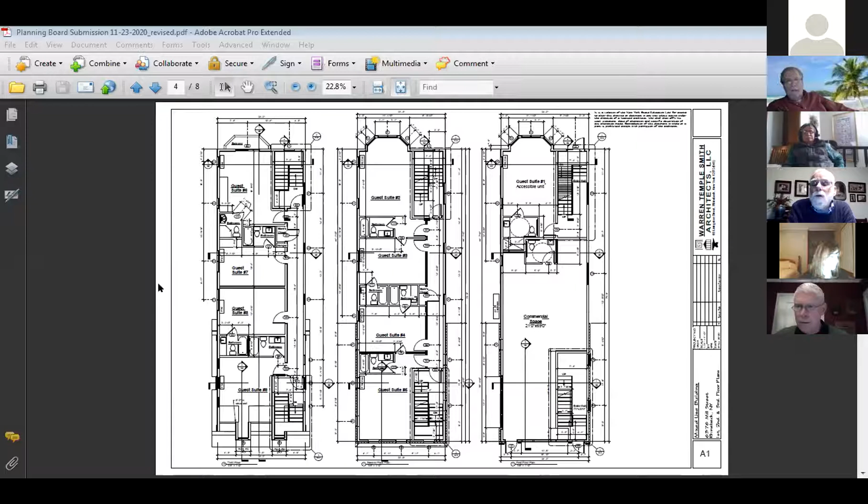Yes, the patio has been reduced. Okay. Everyone noticed. Well, that will show on Ryan's plan. Right. The patio shown on Ryan's plan. The changes made here were additional details and notes on the colors. John Clark had some specific questions about colors of items in the building, including the grills for the package terminal air conditioning units, and basically all the painted colors in the building.

So those notes have been added to the elevation. And another comment or request was for a note to indicate that not only would lot line windows be blocked on the south facade if there's ever a building built immediately adjacent to it, but the overhangs of the cornice would also be removed. So we added that note to the drawings, but those are really the only changes, there are no design changes, if you will, to the drawings.

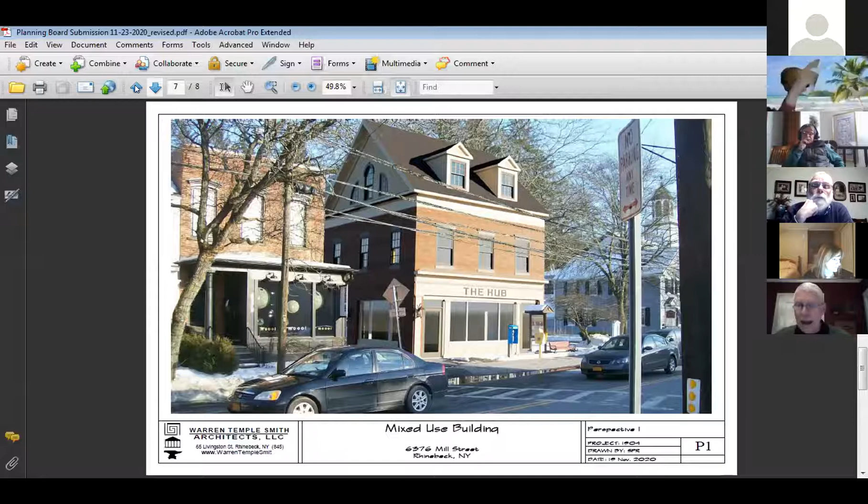And can you just tell me what the colors are on the side? Yeah, I will. The renderings were, you saw last time with the taller frieze on the front, and seen on the side. So going back to it, of course, the brick was indicated before as a vintage red blend.

The clapboard siding is a Benjamin Moore Shelburne buff, which is a light beige, white Lancaster whitewash, historical color. The windows themselves will be white, including the permanent muntins. The storefront will be painted white as well to match any aluminum storefront. The doors are dark blue, called Hale Navy, another historical color.

The grills themselves, we can't match the brick completely, but we're calling for a Benjamin Moore color called Georgian brick, which is a pretty good match for an orange-red brick. And then the roof, we're looking at a GAF Timberline high definition shingle at Williamsburg slate, which is kind of a blue-gray. That's what we're proposing here.

And by permanent muntins, you mean on the exterior of the glass, right? They're adhered to the interior and exterior of the glass, right? All right, good. Well, that's fine with me. Good.

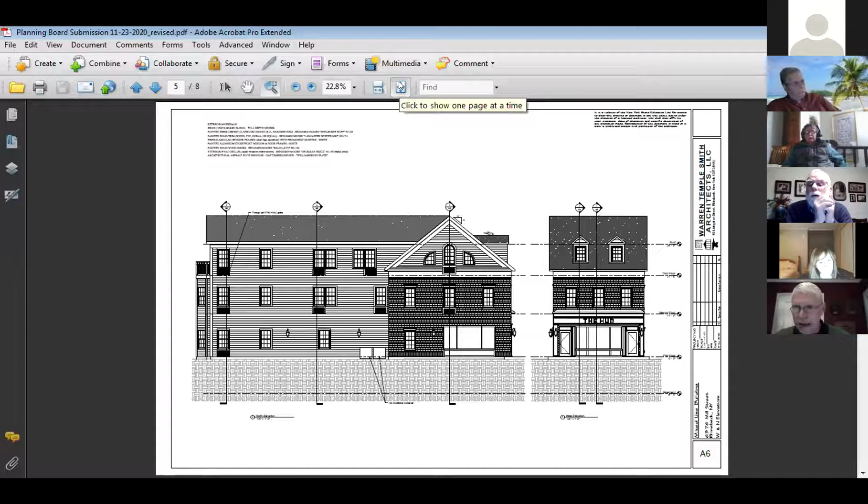I think the other changes are primarily items that Christian added, amended to the site plan, and I would suggest that we let him. Yeah, I can do a quick run through of the site changes. I can share my screen if that will help. Hold on.

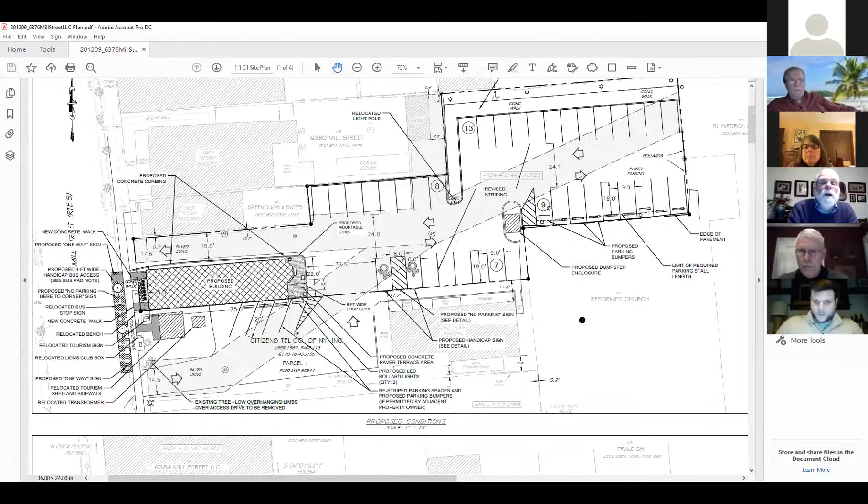I'll run through all of the changes, but the most significant change was the revision to the back patio area. After all of the discussion on concerns with turning radius and the size of the patio, we decided to reduce that size from 24 feet down to 10 feet. That's shown on the plan here.

That will be completely out of the turning vehicle path for the fire apparatus, shown on the second sheet with these circulation details. So to alleviate those concerns, the applicant was happy to reduce the size and make sure everything was outside of that vehicle path.

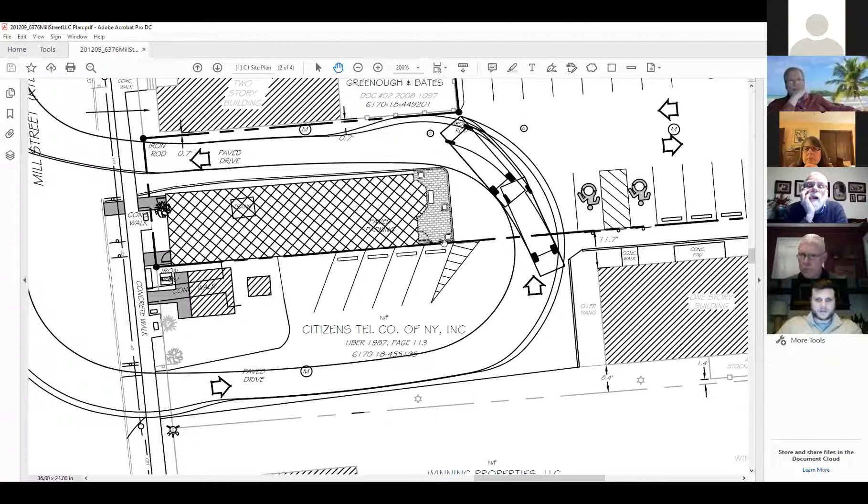We've also added additional details and barriers for protection of any pedestrians going into the rear of the building via this patio. There's 2 light bollards proposed here, easier to see on the planting plan at a larger scale. Those are 30-inch tall concrete bollards—right now we're just showing a typical detail, but they'll be decorative.

With an LED light on top just to light the path, and also for additional protection and notice to cars parking in this adjacent area. The light would be shielded—there's a typical detail right here. It would have a shade on it, so it would really be downward facing light.

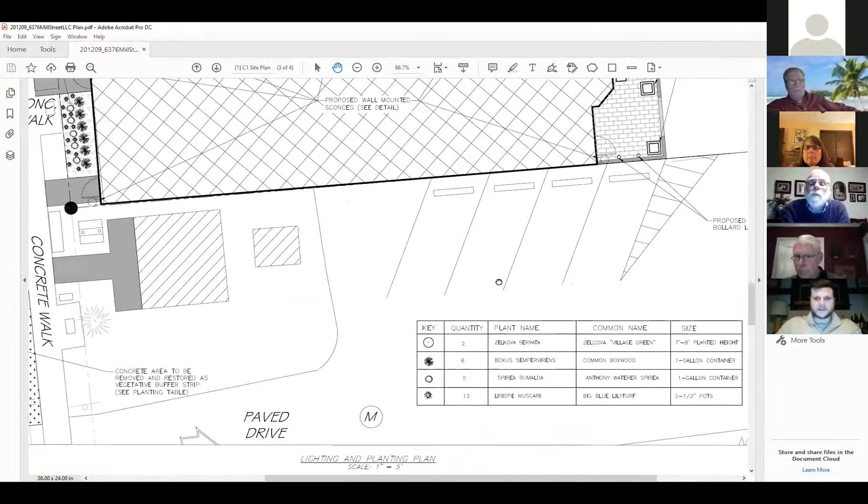We've relocated some of the planters, one on either side of the curb cut. This is a 4-foot curb cut in the rear, and there's 2 planters shown just to delineate the access point, and again to provide an additional barrier for traffic circulating through the site. And then just one more in the corner.

We've added the bump out in the rear that wasn't shown previously, so this coincides with the architectural drawings. And we've added a location for a bench in the patio area.

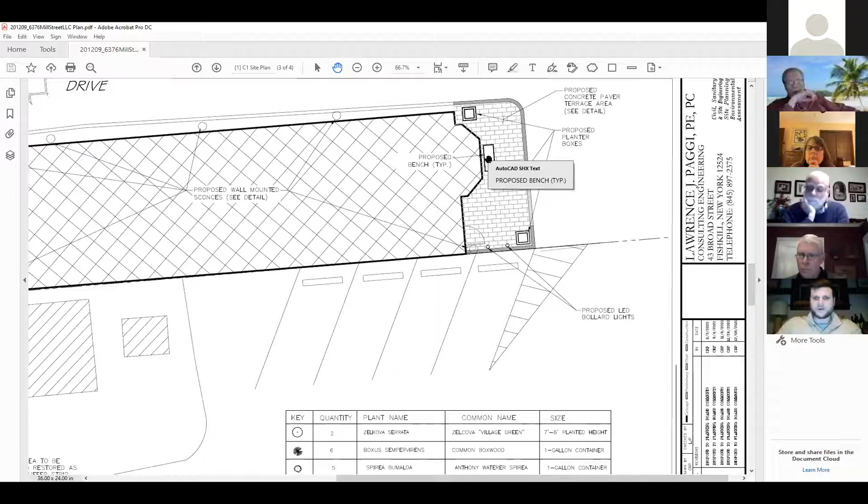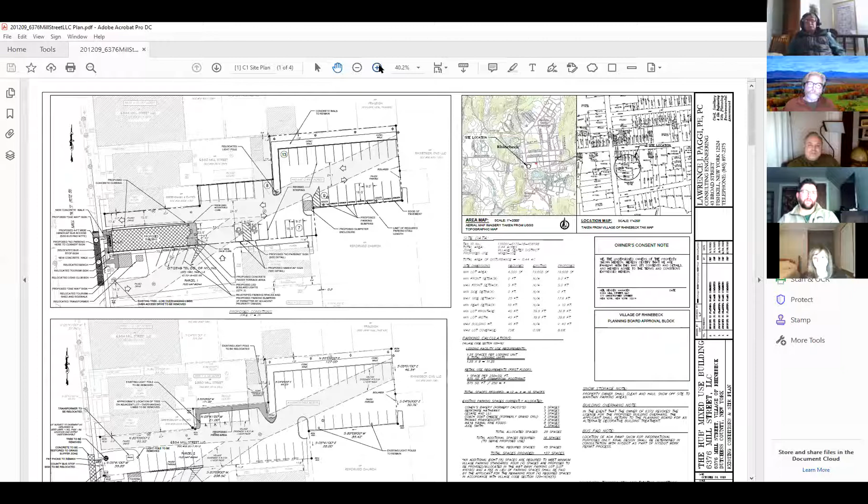In addition, we have shown the parking stalls the way they actually are currently on the adjacent lot on the Frontier property. There's 4 angled parking spaces. Those spots currently extend somewhat onto the subject property—I'll show you on the existing conditions plan.

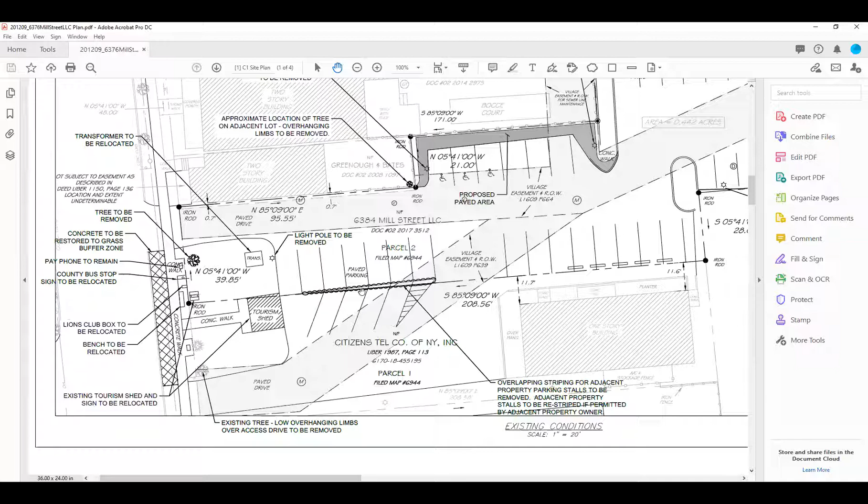And we've called that out. So with the improvements, we will be restriping these spots so the entire spot is located on this property, subject to approval from Frontier, of course. We weren't able to run that by them, but we don't expect any issues—they've been very responsive and good to work with, but that would be subject to them allowing us to do that.

And we've also shown parking bumpers in those existing spots, based on a recommendation from the village engineer, to provide some protection of the building for those parked spaces. So that was a good comment, and again we're proposing that contingent on approval from Frontier.

The other parking bumpers we've shown on this easterly side of the parking lot, we've corrected to make sure to show them in the correct location, not up against the property line or these light pole bases, to provide ample clearance. So that was corrected.

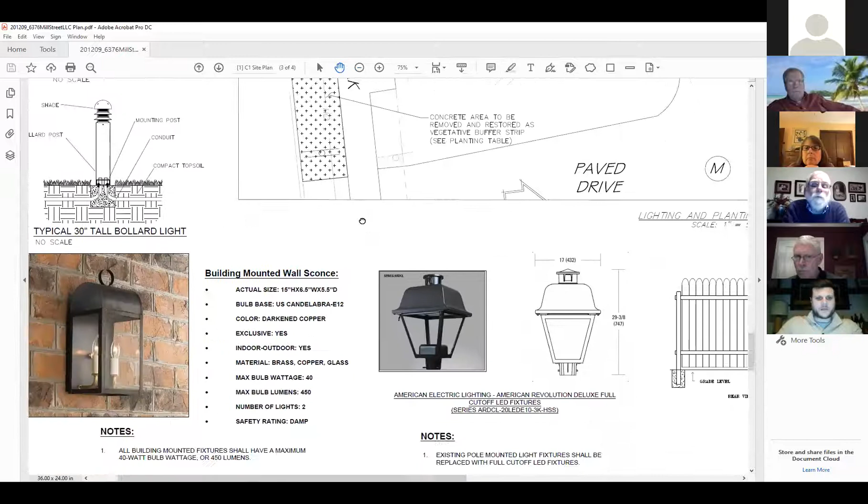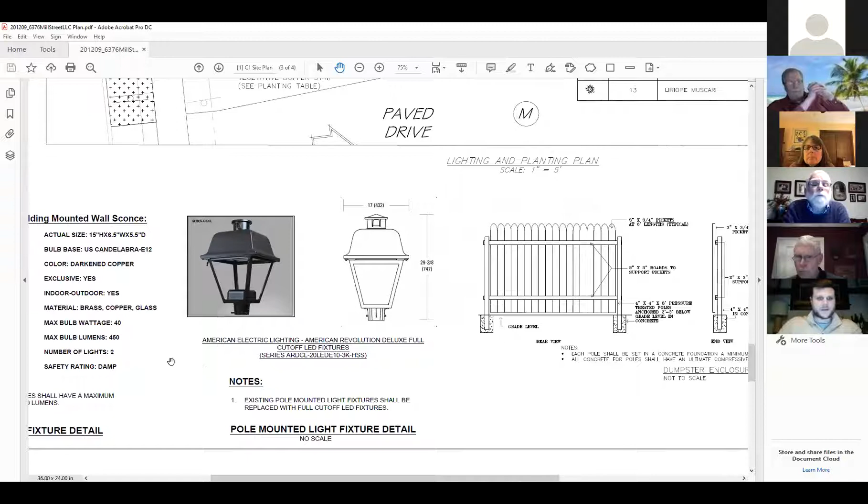And we've also indicated on the detail sheet and lighting plan a light fixture that would be used to replace any non-compliant pole-mounted lights on the property. This is a fully shielded, full cutoff light fixture—actually the same fixture that the board reviewed and approved for the Hobson's site, the amalgamated project from 2018. So we are showing that also.

I believe that was really it. We added some notes to the plan regarding the overhang, just in the event that the license for the overhang with Frontier is ever revoked—the applicant is acknowledging that they would need to return to the planning board for any amendments required in the event that license was revoked.

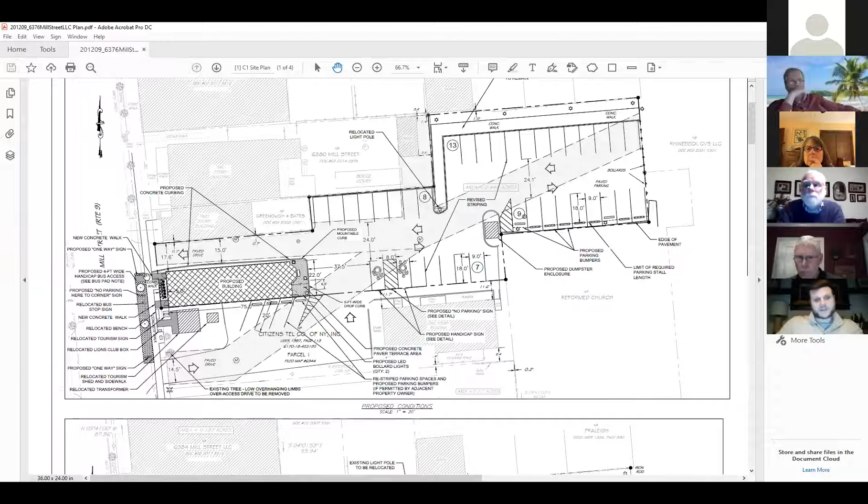Then also for the bus pad, we added a note that the location we're proposing is really just diagrammatic and for informational purposes, and that we know we need to work out the details with the DOT and the village engineer regarding the location and the type of ramp—if it will be a ramp or a flush pad. So that was just noted on the plan also.

The remaining information still required relative to utilities remains the same as at the last meeting. We are acknowledging that we need to provide that to the village and are requesting that we be permitted to provide it as a condition of approval. We don't believe the site will require any amendments to accommodate the utilities, but we acknowledge that if during detailed design any changes would be required, we would need to come back to the board for approval of those changes.

But again, we're not anticipating any changes for the reasons that we put forth in our letter to the board for the last meeting, and I know we've gone through this quite a bit, so I won't belabor the point. I believe that's really it.

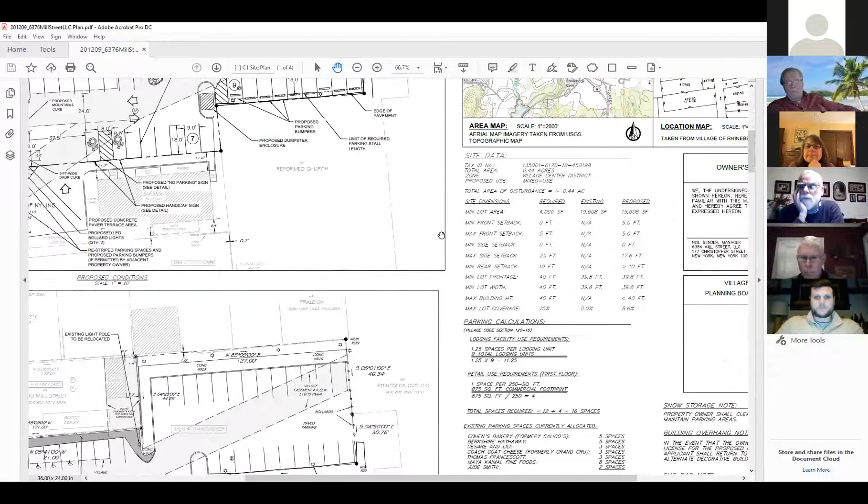Does the board have any questions about the latest revision? Yeah, one question. In the previous version, you had 6 off-site parking places designated across the street on the property, and you reduced it to 4. Was there a reason why you did that rather than pay for 2 more extra spaces?

Thank you, so I missed that. We took out the references to the restaurant. Before we were showing 39 spaces that were required, and that was because of the restaurant calculation. So removing the restaurant calculation, the actual number of spaces is 37. So we just removed 2 spaces from the M&T Bank. We were going to be paying for 2 spaces before, so that just remained the same.

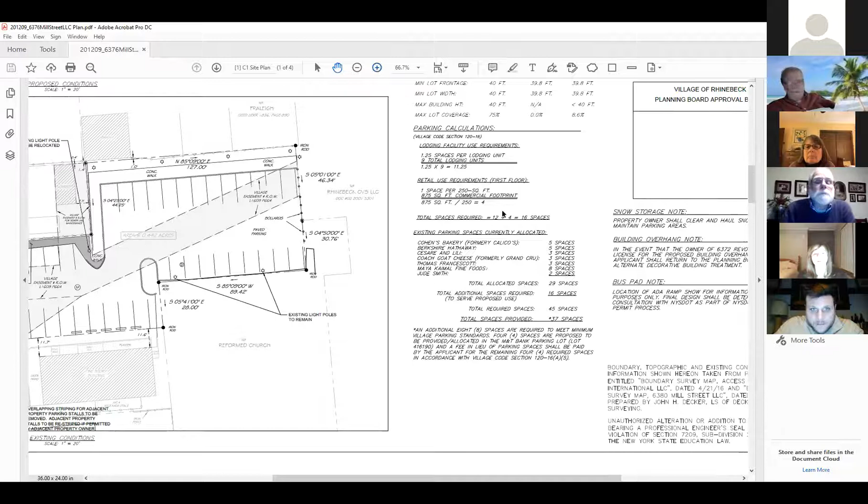All right. How much parking in lieu of fee is needed now? For how many spots? 2 spaces. That didn't change, it was 2 spaces before, and we're at 4. It's 4 and 4. Oh, I'm sorry, off-site. I apologize, 4 in lieu of. Thank you, we have 4 parking in lieu of. Okay, so it is 4. I apologize.

And that has to do with how you guys calculate parking spaces, because if there were a project to come back that needs more spaces in the future, the way your code is written is that you can only pay for half the spaces in lieu of. Right, so this provides the ability to provide 2 more offsite if needed. If we provided them now, there would be no opportunity to pay for spaces in the future. We're just trying to keep the balance there.

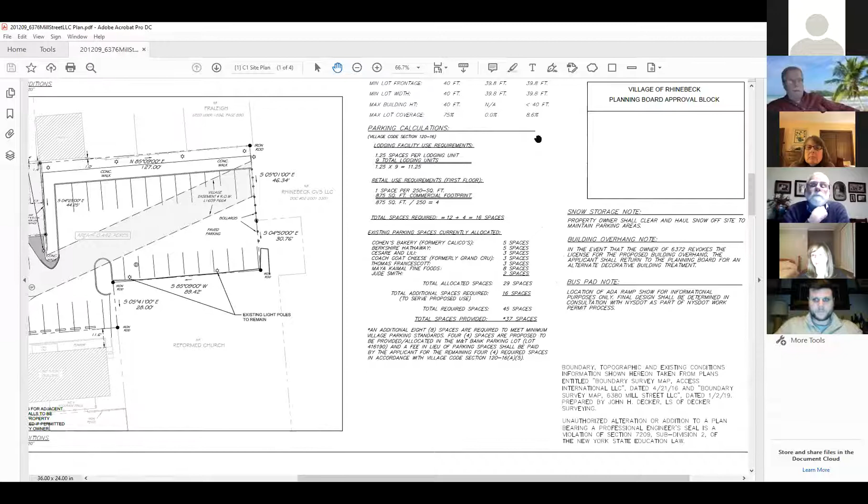All right, does any member of the board have any additional questions? Also, if any member of the public, before I close the public hearing, does any member of the public have any additional comments about this final revision of the plans? Anybody out there?

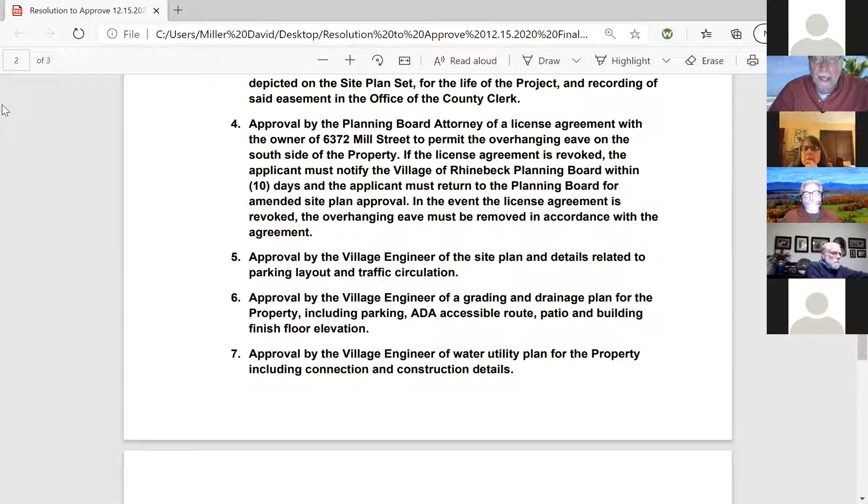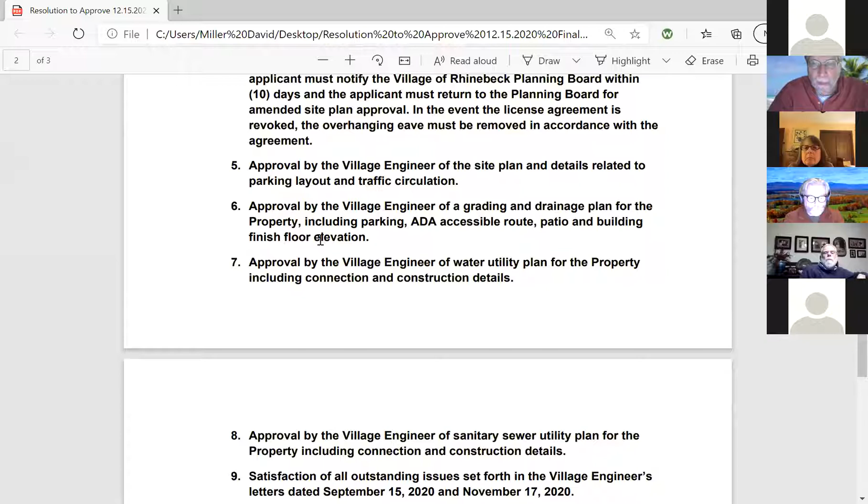Approval by the village engineer of the site plan and details related to parking layout and traffic circulation. Approval by the village engineer of grading and drainage plan for the property, including parking, ADA accessible route, patio building, and finished floor elevation. Approval by the village engineer of water utility plan for the property, including connection and construction details. Approval by the village engineer of sanitary sewer utility plan for the property, including connection and construction details. Satisfaction of all outstanding issues set forth in the village engineer's letters dated September 15, 2020 and November 17, 2020.

Be it further resolved that the ADA ramp for the bus stop shall not be constructed until the DOT work permit has been received, the review of which will include the design of the ADA ramp. Be it further resolved that before a building permit may be issued for construction of a mixed-use building on the site plan. The applicant shall provide the village with evidence that the approved parking easement has been recorded in the office of Dutchess County Clerk.

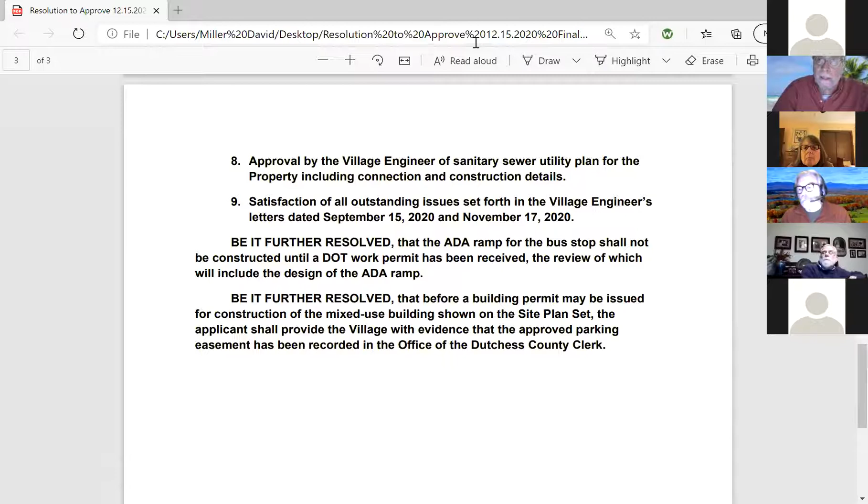Now, is everyone watching happy with that? The planning board, the applicant, and his representatives? We have no comments on those conditions. They're satisfactory to the applicant. Yeah, I think we left the drainage issue and those things up to the village engineer to review as the plans move forward, the construction documents.

Okay, do I have a motion to approve the Hub Hotel at 6384 Mill Street LLC? Someone want to make the motion? I'll make the motion, Michael Gee. We have a second, John Clark, turn on your microphone. All right, I will second it, but just a correction, it's at 6376 Mill Street. 6376 Mill Street, the Hub. Yes. Oh, 64, right, that's the applicant's address. Sorry, a lot of numbers on that.

Yes, thank you. A roll call vote. We have no conditions, right? There's no, all the conditions are in that resolution. We're not missing anything. Okay, roll call vote. Michael Gee, Aye. Mary Quinn, Aye. Jeff Christensen, Aye. John Clark, Aye. David Miller, Aye.